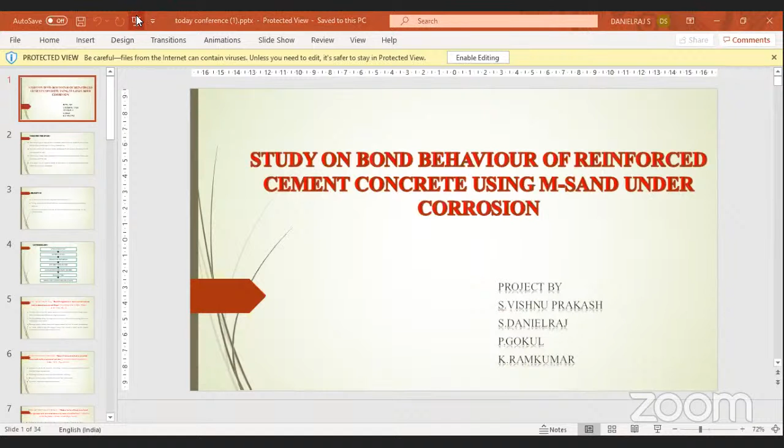Sir, shall we start? You can start, sir. Please start the presentation. Okay, sir. Thank you, sir.

Good afternoon to one and all present here. Our project topic is about a study on bond behavior of reinforced cement concrete using M sand under corrosion. Our project is by me, Vishnu Prakash, Mr. S. Daniel Raj, Mr. P. Gokul, and Mr. K. Ramkumar.

Need for the study: since nowadays corrosion plays a major role in our society in reinforced concrete, it affects the bond between the steel and concrete depending upon the intensity of the corrosion rate. Nowadays river sand availability is less, so in this project we used M sand by replacing river sand. A lot of research studies have already been done to identify the bond behavior of reinforced concrete under corrosion using river sand.

Now we used M sand. Next, the objective of the project: to determine the corrosion level using the accelerated corrosion method, to study the bond behavior of reinforced cement concrete using M sand under corrosion by using the pull-out test, and to undergo a comparative study on the bond behavior of uncorroded specimens with the corroded specimens.

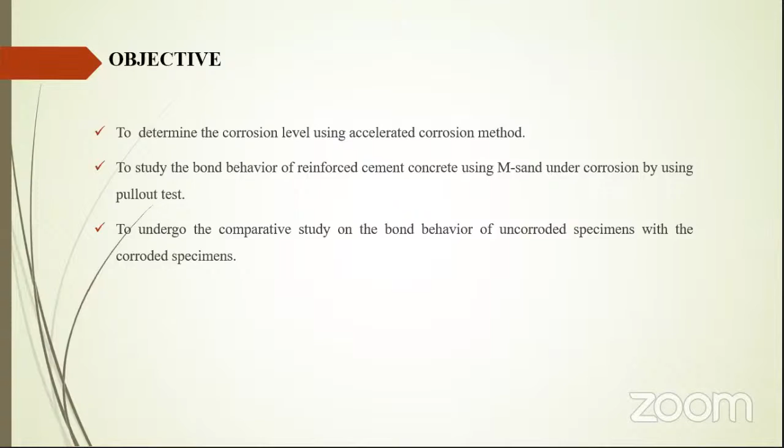Next, our methodology from start: literature study, material study, collecting materials, specimen preparation, then accelerated corrosion method, pull-out test, and next result discussion and conclusion.

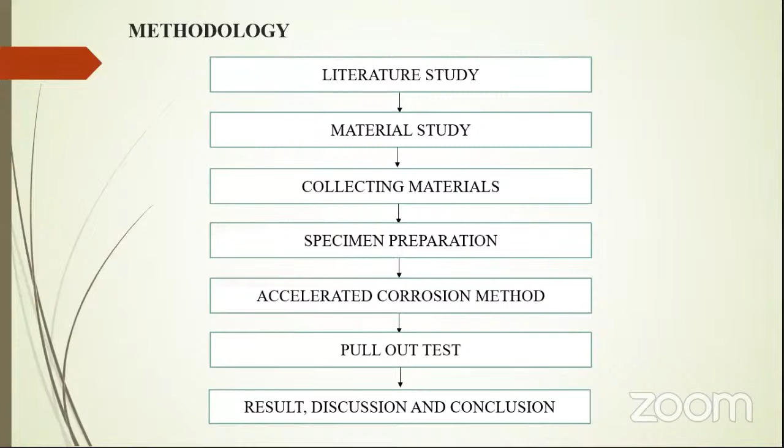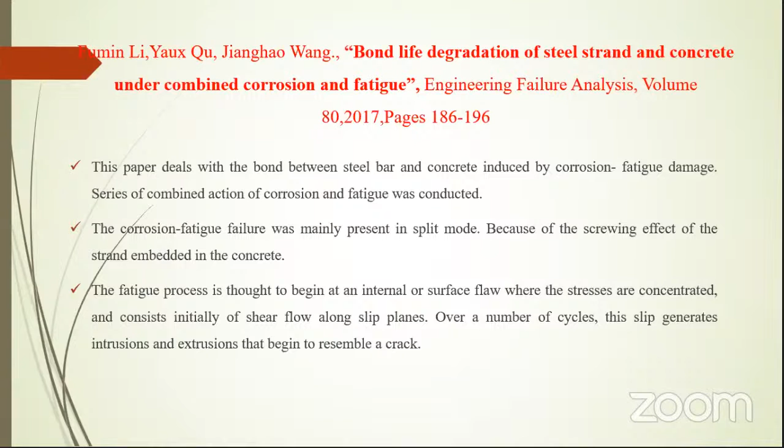Our first literature is about bond life degradation of steel strand and concrete under combined corrosion and fatigue. This paper deals with the bond between steel bar and concrete induced by corrosion fatigue damage. A series of combined actions of corrosion and fatigue was conducted. The corrosion fatigue failure was mainly present in split mode because of the screwing effect of the strand embedded in the concrete. The fatigue process is thought to begin at an internal or surface flaw where stresses are concentrated, and consists initially of shear flow along slip planes. Over a number of cycles, this slip generates intrusion and extrusion that begin to resemble a crack.

The next literature is about the study of the loss of bond in reinforced concrete specimens with accelerated corrosion by means of push-out tests. This paper deals with the following point: the maximum shear stress in the test is not affected by corrosion depth for the given corrosion levels.

The residual stress of specimens with a small corrosion depth was greater than that of non-corroded specimens due to increase of surface roughness. Besides, crack widening was greater for specimens with higher corrosion level, which may explain why the residual stress of those specimens was small.

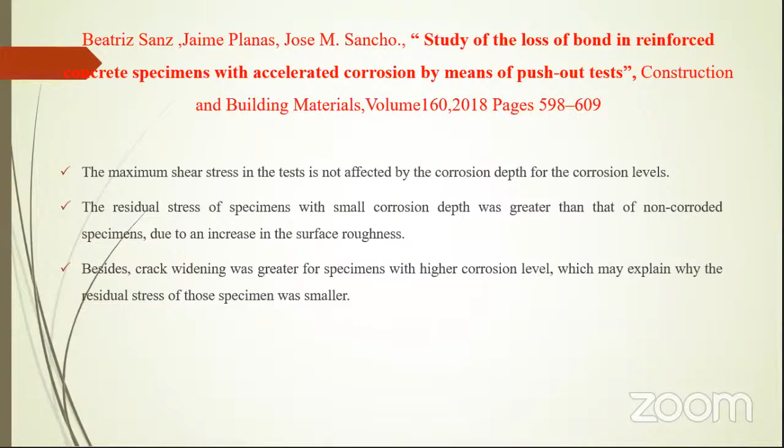The next literature is about bond strength evaluation of corroded steel bars via the surface crack induced by reinforcement corrosion. The corrosion of steel bars in reinforced concrete structures induces concrete cover cracking and leads to reduction in the steel-concrete bond strength. It is further revealed that the bond strength decreases exponentially with the surface crack width. After concrete cover cracking, there is a strong correlation between the surface crack width and the corrosion level. When the crack width becomes relatively large, further increase of corrosion penetration has less influence on crack width.

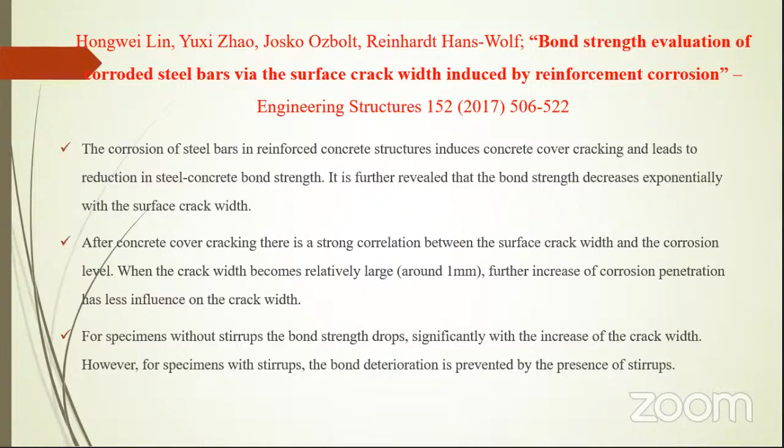For specimens without stirrups, the bond strength drops significantly with the increase of crack width. However, for specimens with stirrups, the bond deterioration is prevented by the presence of stirrups.

The next literature study is about bond behavior with reinforcement corrosion. This paper says that an increase of bond efficiency of up to 2% corrosion was registered in the absence of confinement exerted by stirrups. However, a sudden reduction was observed when higher levels of corrosion were reached, and then only limited residual bond strength was evidenced for increasing levels of corrosion. The confined specimen showed an initial increase in bond efficiency from 0% to 2% level of corrosion, whereas substantial uniformity of bond strength level was maintained for higher levels.

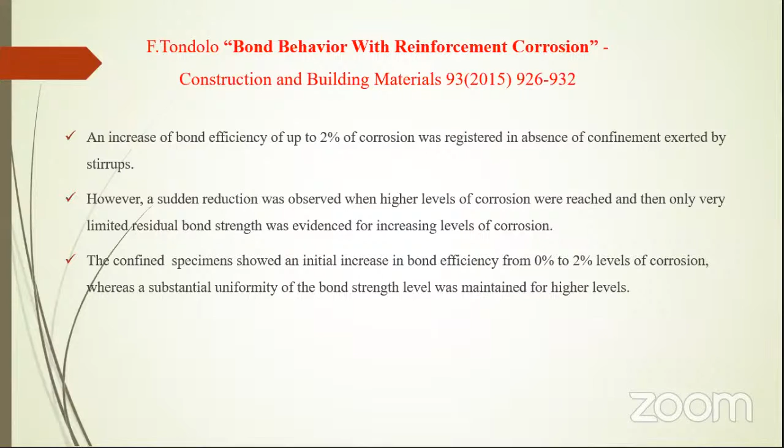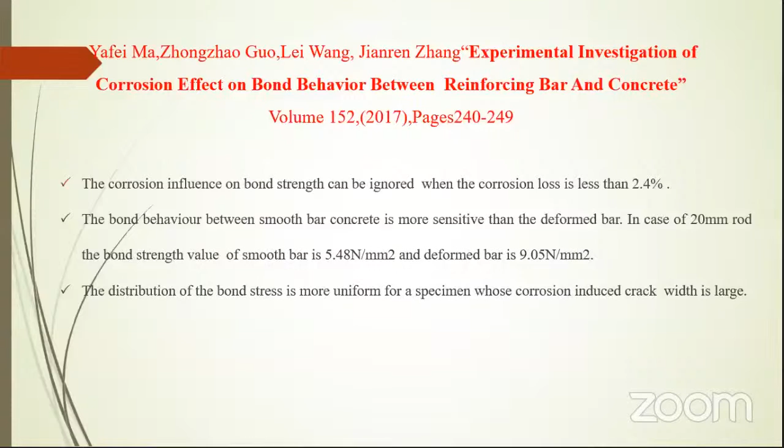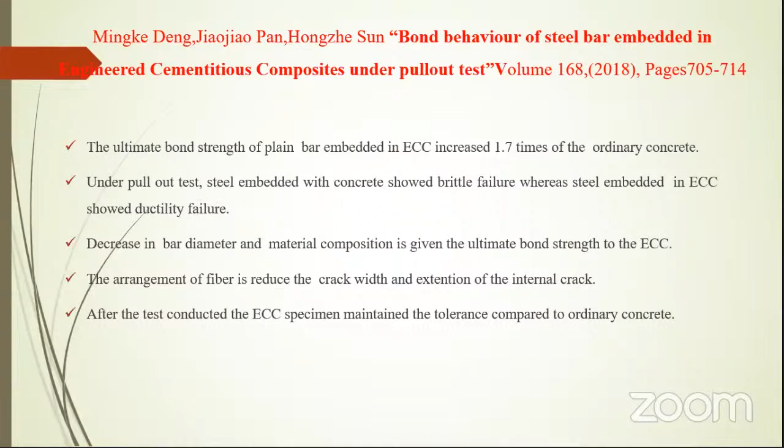Decrease in bar diameter and material composition give the ultimate bond strength to the ECC. The arrangement of fiber reduces the crack width and the extension of the internal crack. After the test conducted, the ECC specimen maintained the tolerance compared to ordinary concrete.

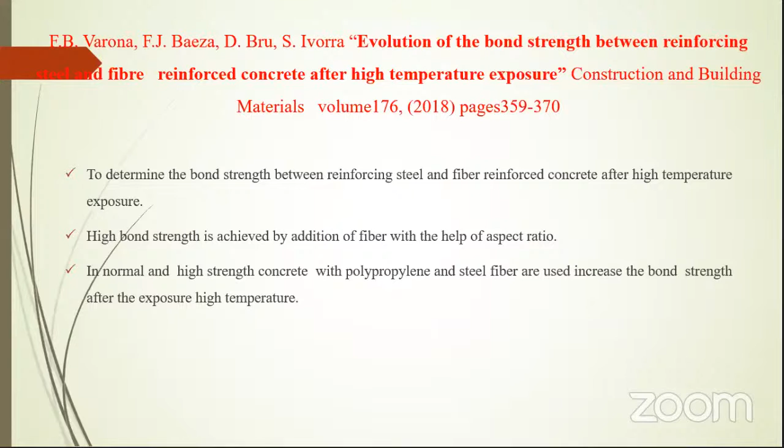The next paper is about evolution of the bond strength between reinforcing steel and fiber reinforced concrete after high temperature exposure, to determine the bond strength between reinforcing steel and fiber reinforced concrete after high temperature exposure. High bond strength is achieved by addition of fiber with the help of aspect ratio. In normal and high strength concrete, polypropylene and steel fiber are used to increase the bond strength after high temperature.

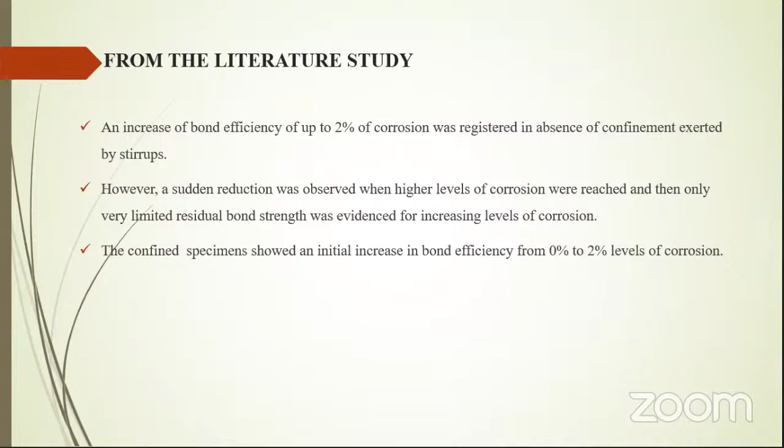From the above literature study, we can take some points: an increase of bond efficiency of up to 2% corrosion was registered in absence of confinement exerted by stirrups. However, a sudden reduction was observed when higher levels of corrosion were reached, and then only very limited residual bond strength was evidenced for increasing levels of corrosion. The confined specimen showed an initial increase in bond efficiency from 0% to 2% levels of corrosion.

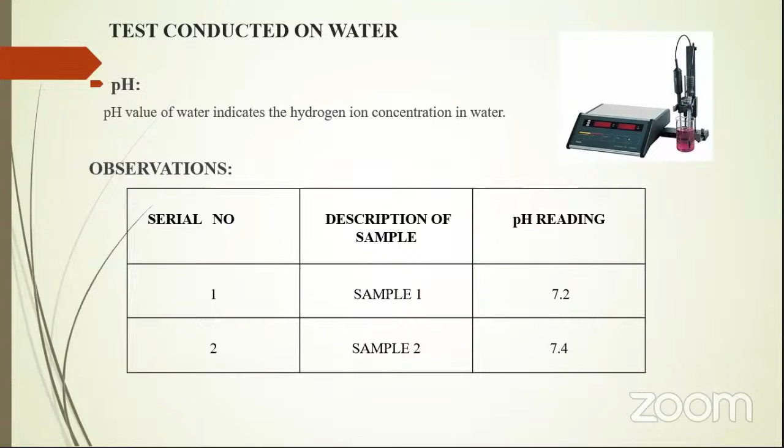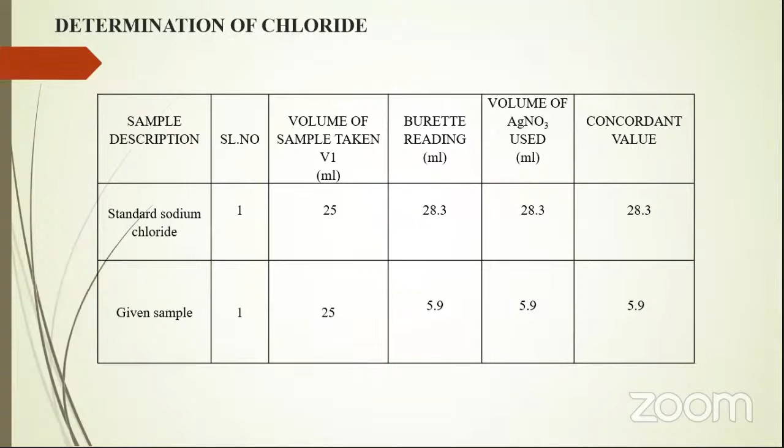In water, the pH value indicates hydrogen ion concentration in water. For our water testing, the pH reading is about 7.2 to 7.4. In determination of chloride, for a standard sodium chloride, the value we get is about 28.3, and the sample is about 5.9. For sulfate,

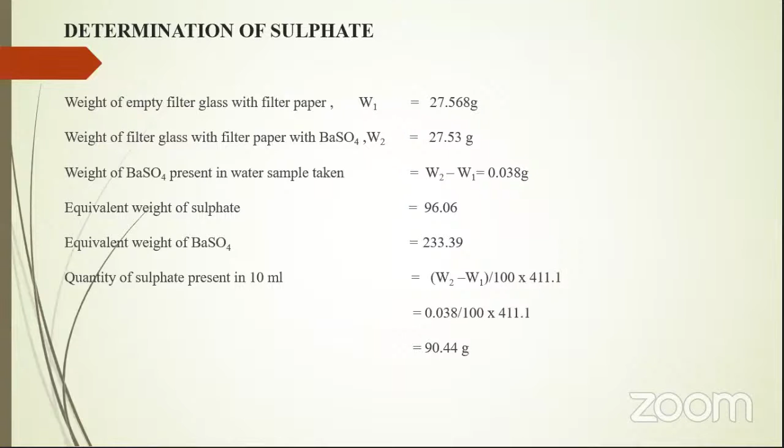In the cement, we use the sulfate present in 10 ml, which is about 90.44 gram.

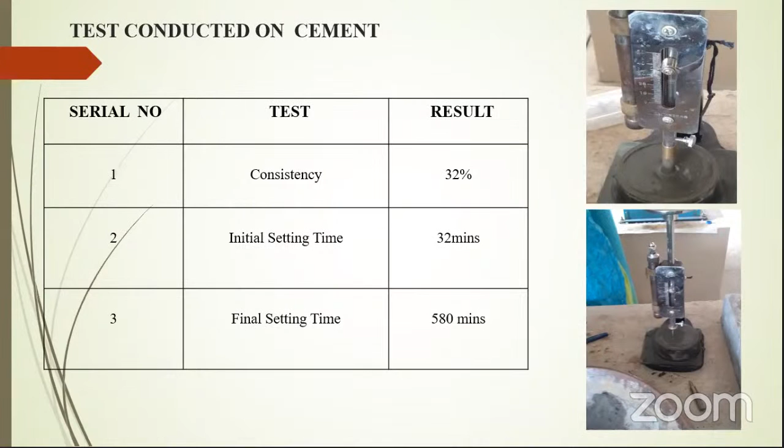Test conducted on water: the permissible limit for the chloride test is about 250 milligram per liter, and for sulfate test we get about 90.44 milligram per liter, for which the permissible limit is 200 milligram per liter. For consistency, the result is about 32%, and initial setting time is 32 minutes. Final setting time is about 580 minutes. For coarse aggregate and fine aggregate, we found the specific gravity for fine aggregate is about 2.7, which is within the permissible limit.

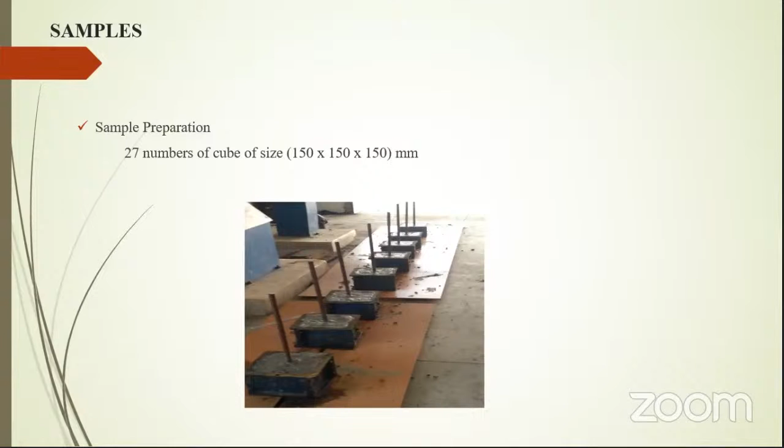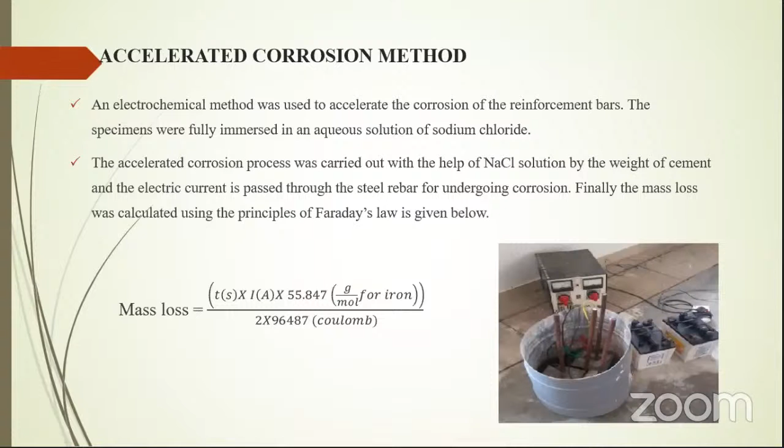Accelerated corrosion method: an electrochemical method was used to accelerate the corrosion of the reinforcement bars. The specimens were fully immersed in an aqueous solution of sodium chloride. The accelerated corrosion process was carried out with the help of NaCl solution by the weight of cement, and electric current is passed through the steel rebar for undergoing corrosion. Finally, the mass loss was calculated using Faraday's law. The mass loss formula is about this.

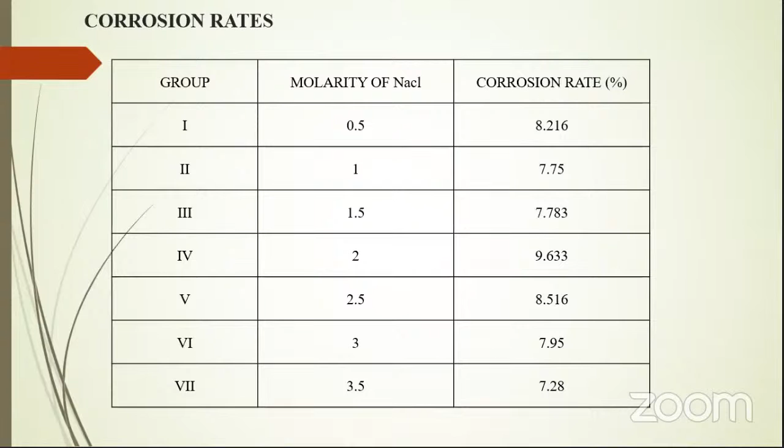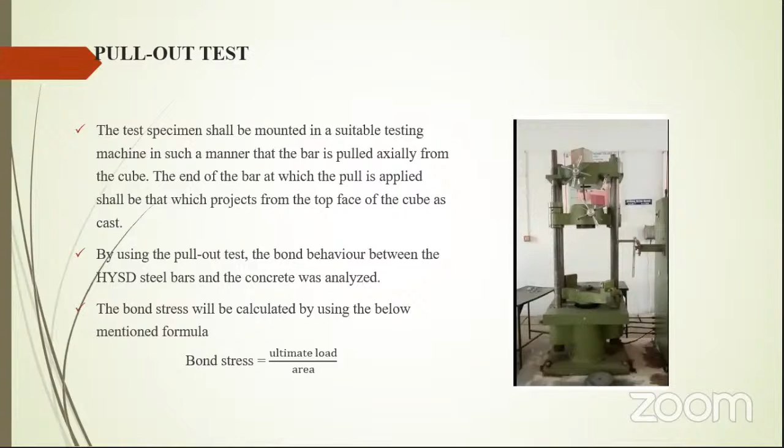Pull-out test: the test specimen shall be mounted in a suitable testing machine in such a manner that the bar is pulled axially from the cube. The end of the bar at which the pull is applied shall be that which projects from the top face of the cube as cast. By using the pull-out test, the bond behavior between HYSD steel bars and concrete was analyzed. The bond stress will be calculated using the formula: bond stress equals ultimate load divided by area. The average bond stress of the corroded specimens for group 1 reached about 8.216, and for group 2, 7.7 megapascals.

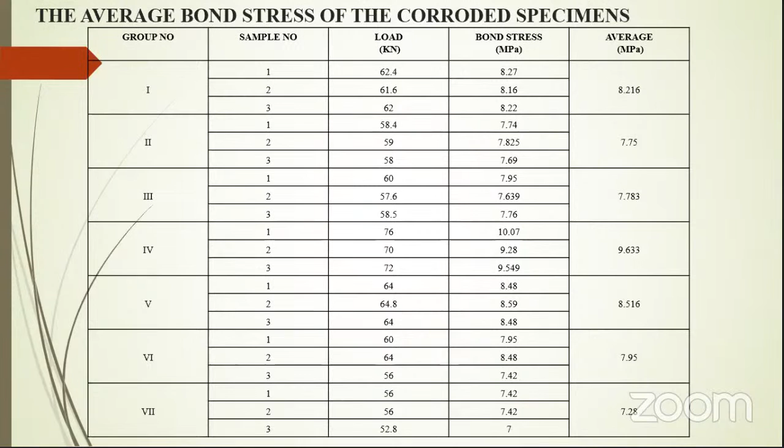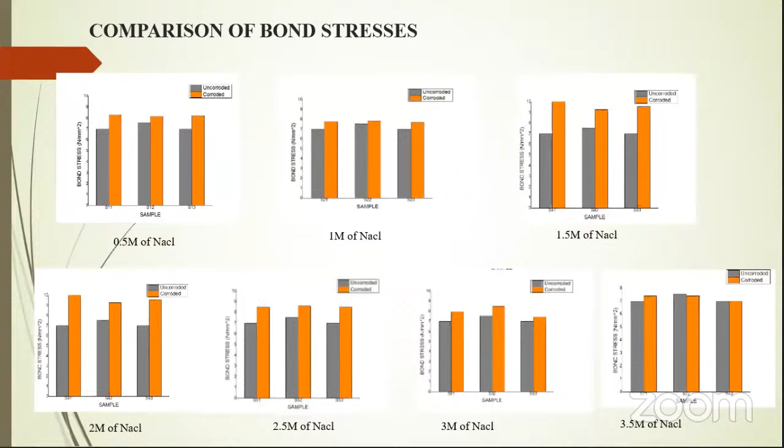Conclusion: the behavior of concrete made up of 100% M sand embedded with high yield strength deformed steel rods was calculated experimentally. With the help of the pull-out test, the variation of bond strength is calculated. The bond behavior of specimens using M sand with corrosion for different corrosion rates was performed. These results are compared with specimens without corrosion to identify the bond behavior between steel bar and concrete. From this comparative study, the average bond strength value increases for initial corrosion rates, followed by a decrease for higher corrosion rates. This initial increase in bond strength is due to the formation of a corrosion layer between the steel and the concrete.

The bond strength values for 0.5 molar NaCl, when compared with uncorroded specimens, increases by 8%; for 1 molar NaCl increases by 8.5%; for 1.5 molar NaCl increases by 34%; for 2 molar NaCl increases by 18.7%; for 2.5 molar NaCl increases by 10.8%; and for 3 molar NaCl increases by 1.5%.

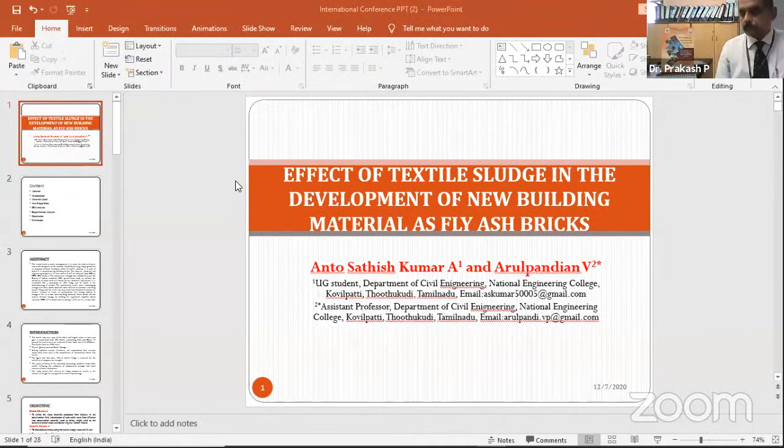Sir, shall I start? Please go ahead, start. Is it Anto Sathish presenting or Arulpandian presenting? Sir, Anto Sathish Kumar, sir. Okay, please start your presentation, sir. Oh okay sir, thanks. Good afternoon, one and all present here.

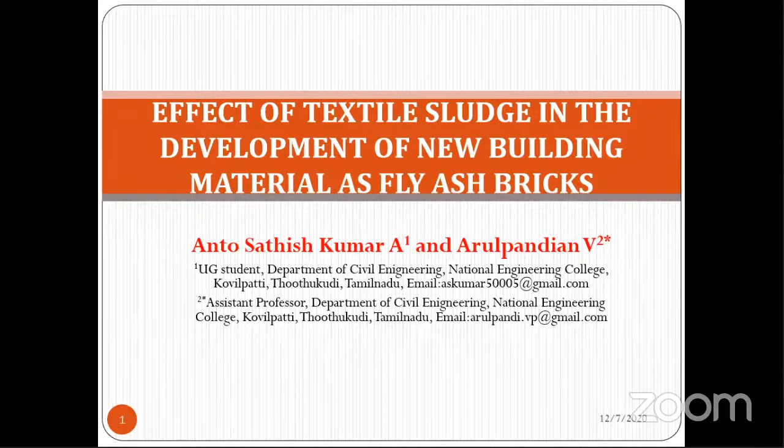Our topic is Effect of Textile Sludge in the Development of New Building Material as Fly Ash Bricks. Myself, Anto Sathish Kumar, along with Arulpandian, we are from the Civil Engineering Department, National Engineering College, Kovilpatti, Tamil Nadu. These are the contents I'll cover in the following slides.

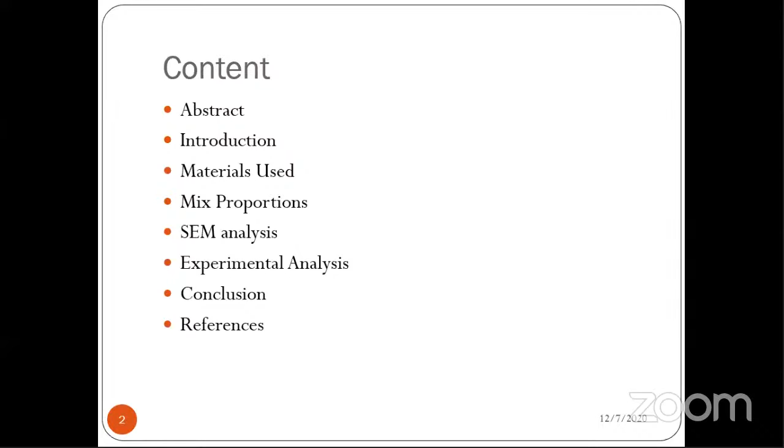Let's see one by one, starting with the abstract. The current trend in waste management is to reuse industrial waste into usable products. Sludge is generated in the common effluent treatment plant of the textile industry. The physical, chemical, and engineering properties of this material will be analyzed using EDS or EDX and other analyses. Compressive strength testing was conducted as per Bureau of Indian Standards to evaluate the suitability of this material in structural applications. It is concluded that a maximum of 12% of sludge can be added in the bricks. The preliminary results were encouraging enough. Along with these results, further research in terms of leachability testing is being conducted to recognize this as a non-toxic building material. This material does not require thermal energy for binding, which consumes about 7,000 tons of firewood, and air curing is sufficient for just 14 days.

Introduction: The textile industry is one of the oldest and largest sectors in India, with historical association to the Silk Route connecting India and China. At present, textile units are scattered all over India. Out of 21,076 units, Tamil Nadu alone has 5,285 units.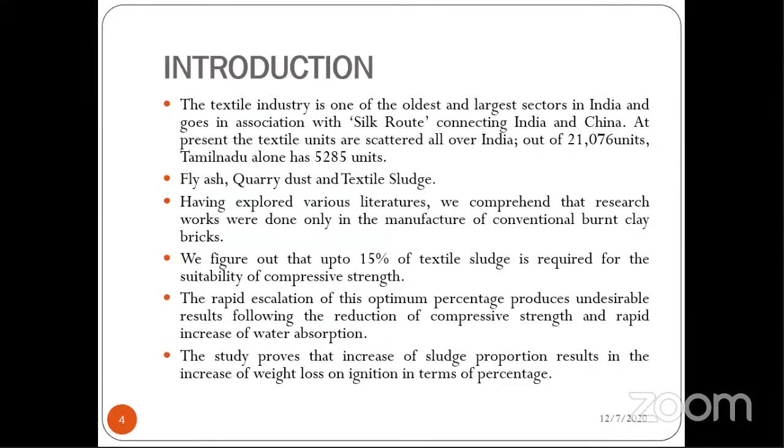Let's come to the objective. Our objective is to utilize waste material produced from industry in the construction field. Transmission of such solid waste from effluent into construction material might yield a culture of preservation and conserving mother nature. Our specific objective is to manufacture brick using textile sludge waste and fly ash.

We aim to study the effect of sludge on the plasticity index of the brick, to carry out experimental investigation on the brick to test its compression, water absorption and permeability, and to save thermal energy, which amounts to 70 tons of firewood for firing 1 lakh bricks. The new process does not require firing.

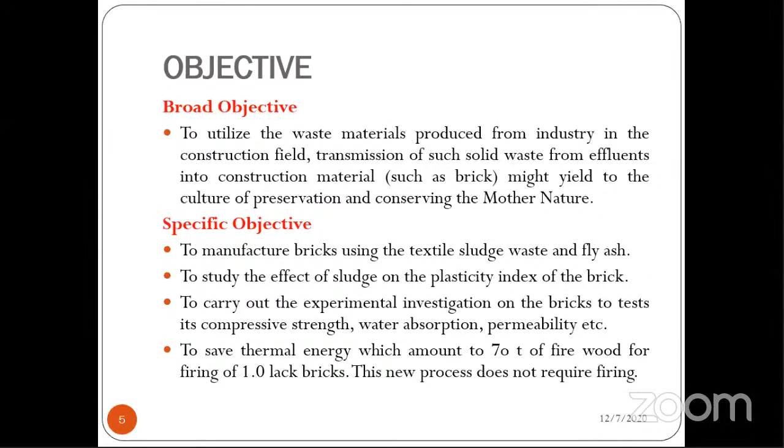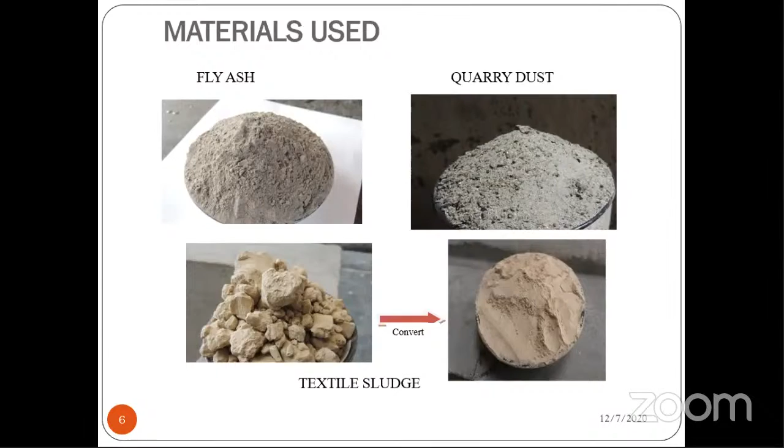These are the materials we use: fly ash, quarry dust, and textile sludge. We converted the textile sludge into powder form. Let's look at the first one, fly ash. Fly ash is a highly dispersive powder.

These byproducts are dumped in large scale at every thermal power station. For the current research work, fly ash from thermal power stations is obtained and will be utilized in the manufacture of bricks. Fly ash particles, which are generally spherical, these small glass spheres improve the fluidity and workability.

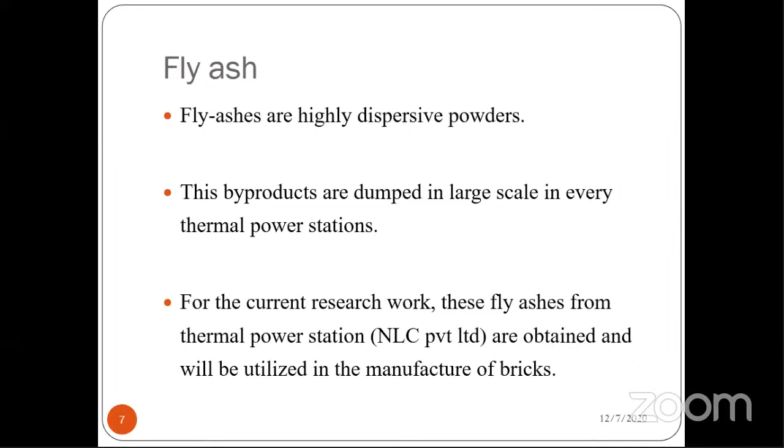Next, quarry dust. In stone crusher quarries, a considerable amount of quarry dust is produced as a byproduct. Currently, most quarry dust is disposed of in sanitary landfills or open dumped in uncontrolled waste pits and open areas. Substantial amounts of this powder have accumulated, and its utilization poses an important problem. Hence, such powder emission produces air pollution at the quarry.

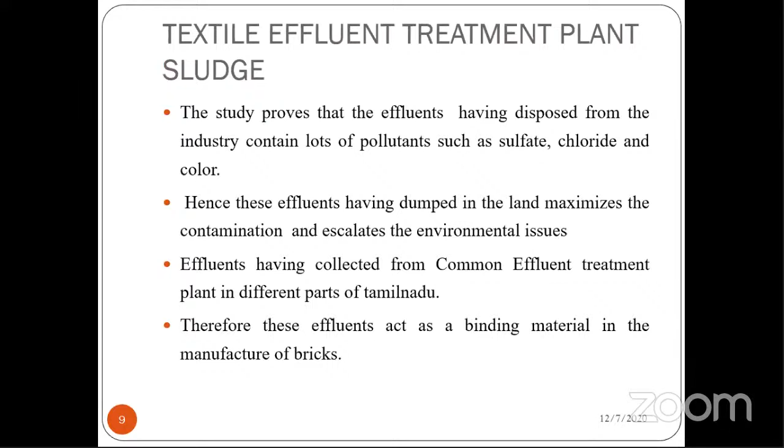It does not combust as well as other materials, and sludge. The study proves that the effluent disposed from industry contains lots of pollutants such as sulfate, chloride, and color. Hence, this effluent dumped into the land maximizes contamination and escalates environmental issues. Effluents were collected from common effluent treatment plants in different parts of Tamil Nadu. Therefore, this effluent acts as a binding material in the manufacture of bricks.

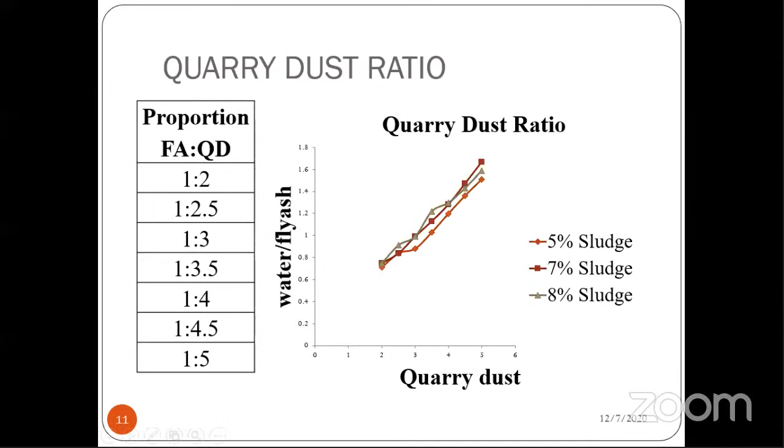Let's come to the mixed proportion for fly ash and quarry dust ratio. This is the graph plotted between water, fly ash, and quarry dust. Here we used 3 different percentages of sludge: 5, 7 and 8. Finally, we took 3 as the optimum one. Here we see that before and after 3, the results vary.

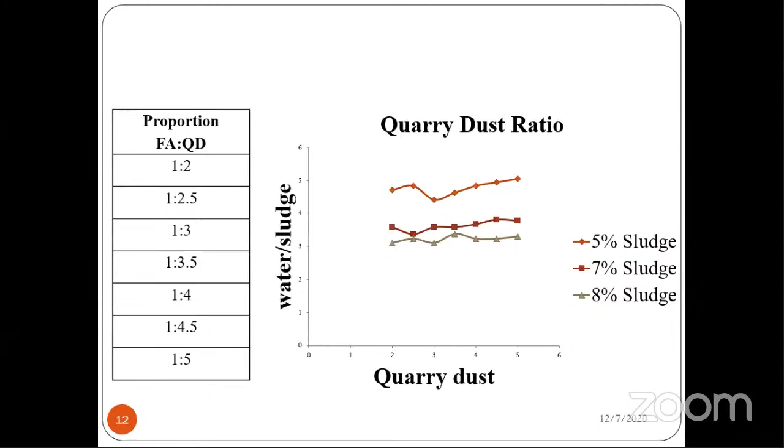Next, here the plot is drawn between water, sludge, and quarry dust. Here also we use the same percentages, and here also we get the same 3 as optimum. We finalize 3 as the optimum, and we go with 3 ratios: 1:3, 1:2.5, and 1:2.

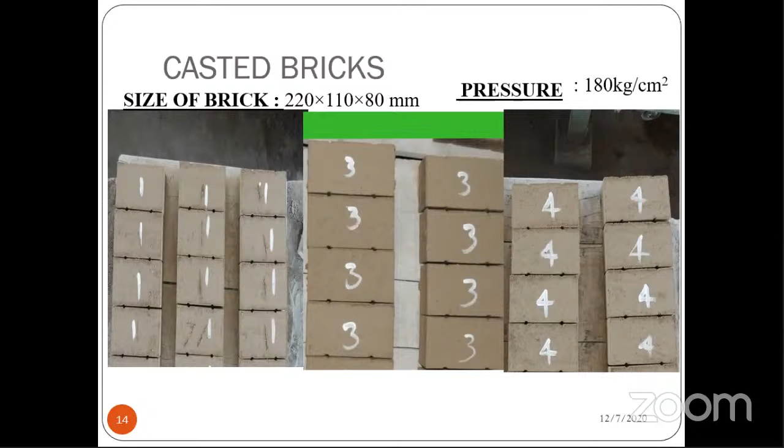And we cast bricks. The size of the bricks is 220 cross 110 into 80 mm. The hydrostatic pressure applied to make the brick was 180 kilogram per centimeter square. And now the results.

Having analyzed the strength of the brick, we discovered that the brick remained inadequate to achieve the required strength as per IS norms. So we planned to add 2 additional materials, lime and gypsum, in addition to the existing raw material. We eventually obtained the desirable result with the further addition of lime and gypsum, intended to enhance the required strength of the fly ash bricks.

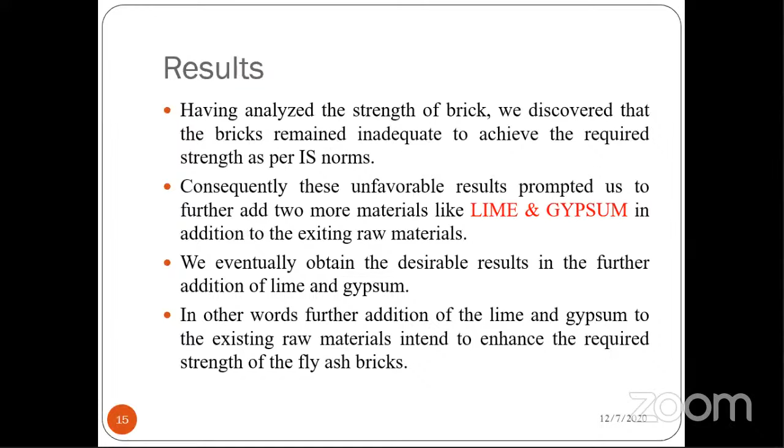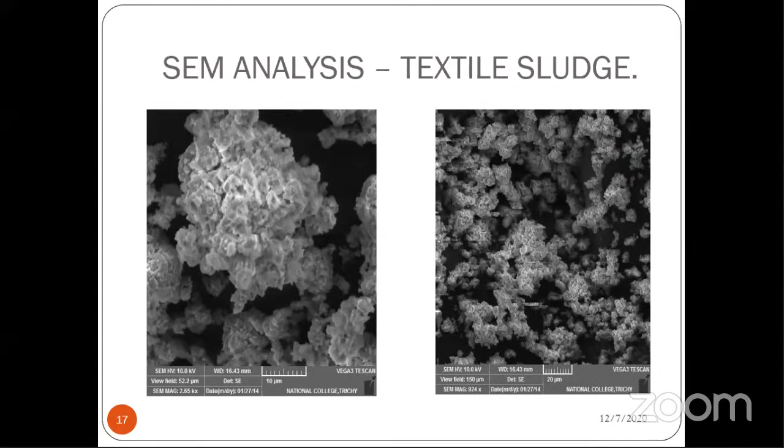And these are the images. We did some analysis to find the particle separation. It shows particle size inside the structure. The first image is at 10 micron distance, and others are at 20, 5, and 2 microns.

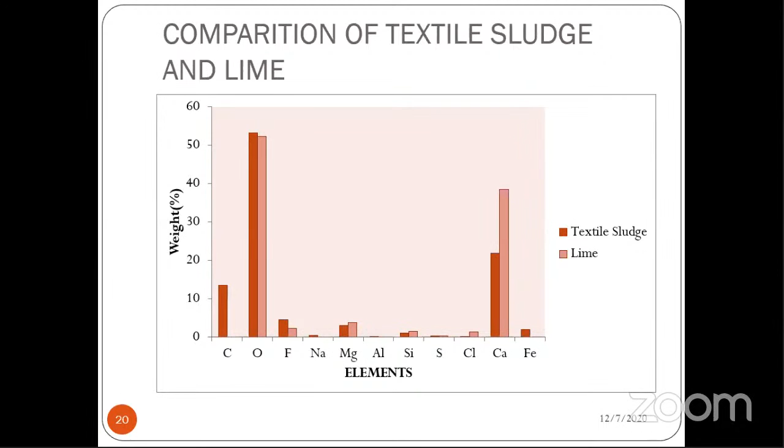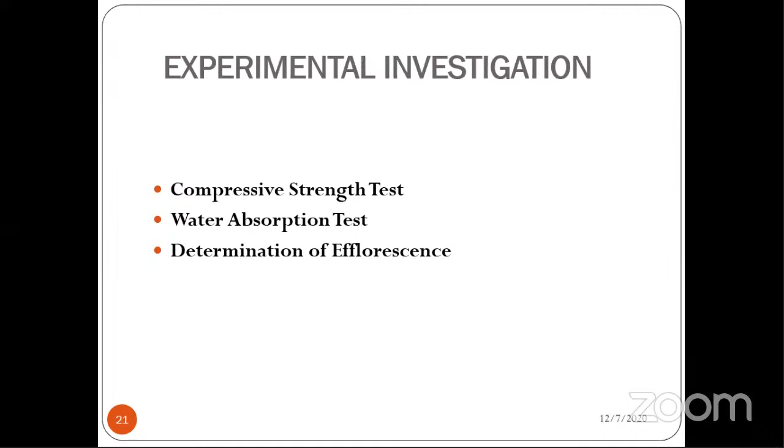Experimental investigation included compressive strength test, water absorption test, and determination of efflorescence. For compressive strength, the y-axis shows compressive strength and the x-axis shows mix combination. Here we used 6 different combinations and found the 7th day and 14th day compressive strength.

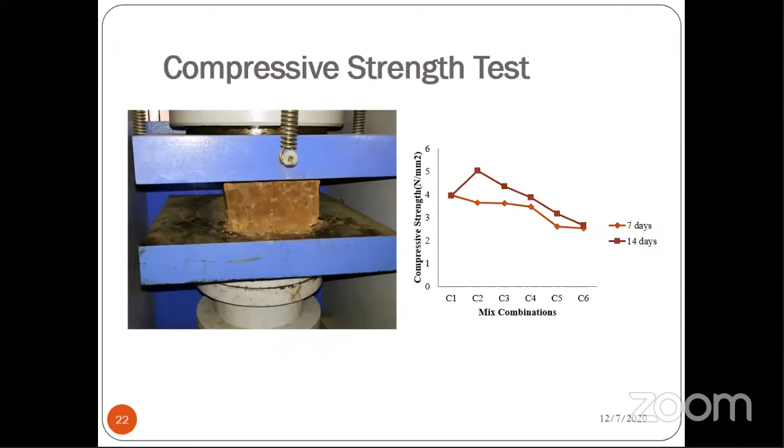And water absorption test and efflorescence. The soluble salts being present in bricks will cause efflorescence on the surface of bricks. For finding out the presence of soluble salts in bricks, these tests were carried out.

The bricks are immersed in water for 24 hours. Then the bricks were taken out and allowed to dry in shade as per IS norms. As per IS norm, the liability to efflorescence shall be reported as nil, slight, moderate, heavy, or serious. Here we get the result as nil.

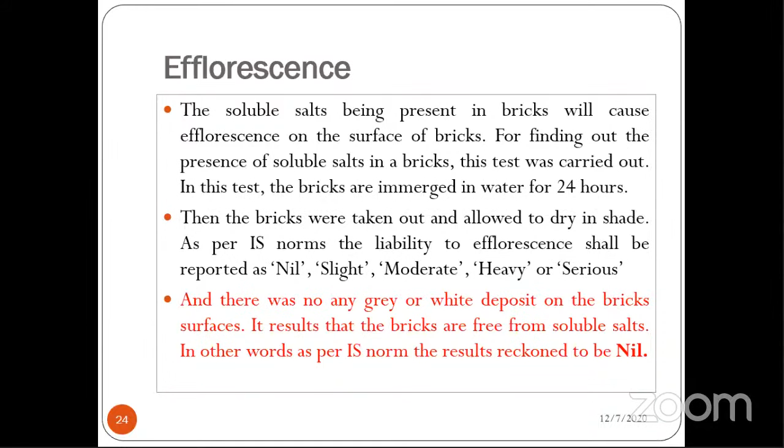And finally come to the conclusion. The result of the brick 1:2, 1:2.5, and 1:3, with one part being fly ash and the other as quarry dust. In addition, textile sludge was added in the ratio of 7%, 10%, and 15%. The shape of the brick was well obtained, but does not attain the minimum strength of 3.5 Newton per mm square as per IS.

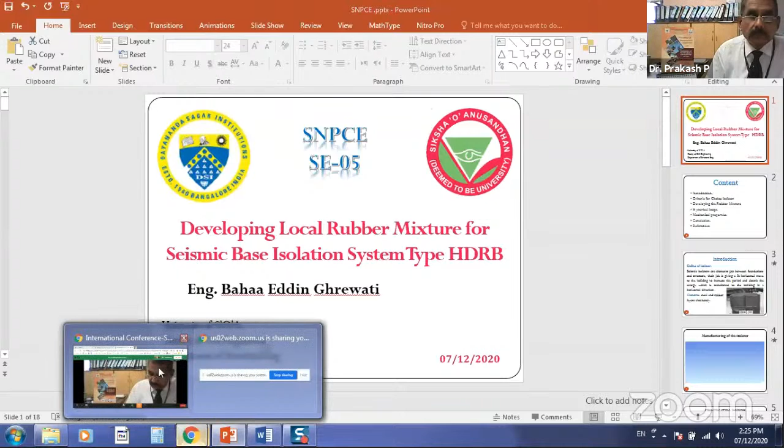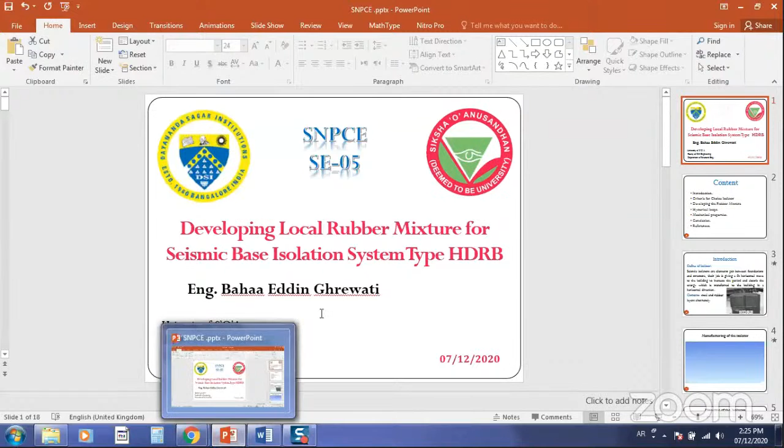Thank you, sir. Good afternoon, all. I would like to thank you for giving me a chance to present my article, which joins mechanical and civil engineering together, entitled Developing Local Rubber Mixture for Seismic Base Isolation System Type HDRB. It contains introduction, criteria of choosing the isolator, developing the rubber mixture, technical and mechanical properties, and finally conclusion.

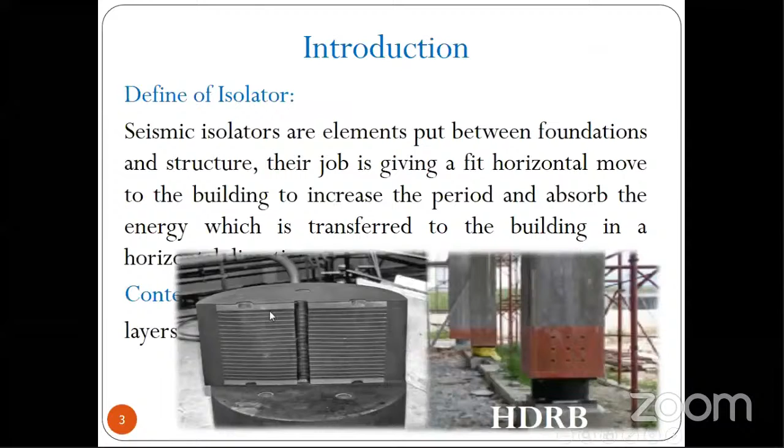Seismic isolators are elements put between foundations and structure. Their job is giving a fit horizontal move to the building to increase the period and absorb the energy which is transferred to the building in horizontal direction. The isolator consists of steel and rubber layers alternately, as shown in this figure.

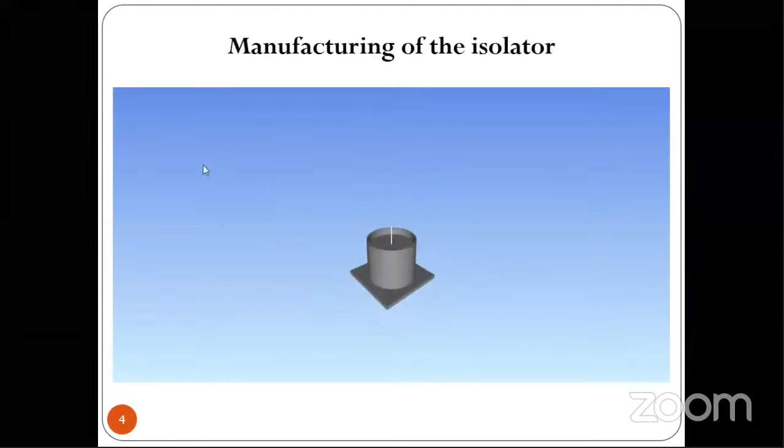This video shows the manufacturing process of the isolator, where we put the steel and rubber layers alternately. This video also shows the difference between an isolated and non-isolated building, where the objectives of isolators are avoiding human usage interruption and decreasing building failure.

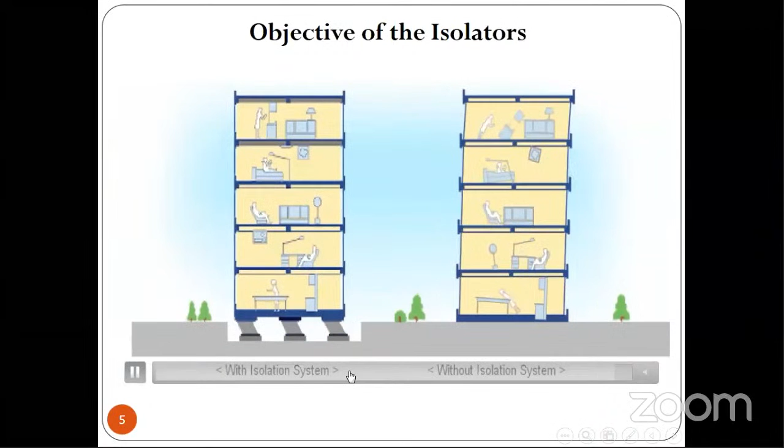The isolators increase the building period that leads to decrease the acceleration and the horizontal load as well. And the damping ratio for isolators is between 5 to 30%.

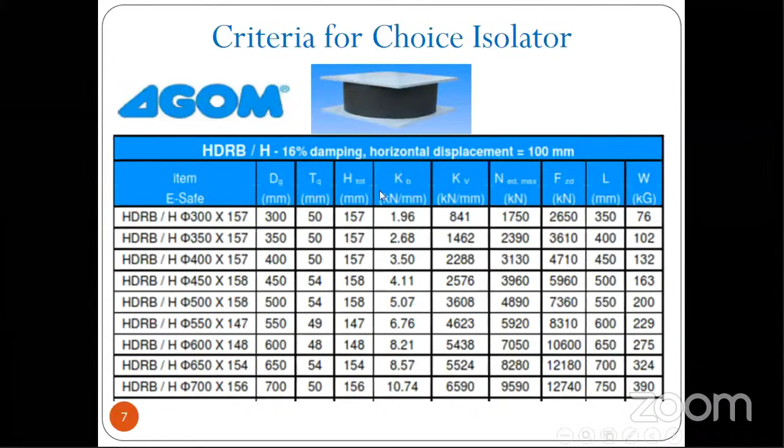This is a table from a company which produces several kinds of isolators. The table has many important details like damping ratio, the displacement, also this is the critical displacement, dimensions of the isolator, diameter and height, also vertical and horizontal rigidity.

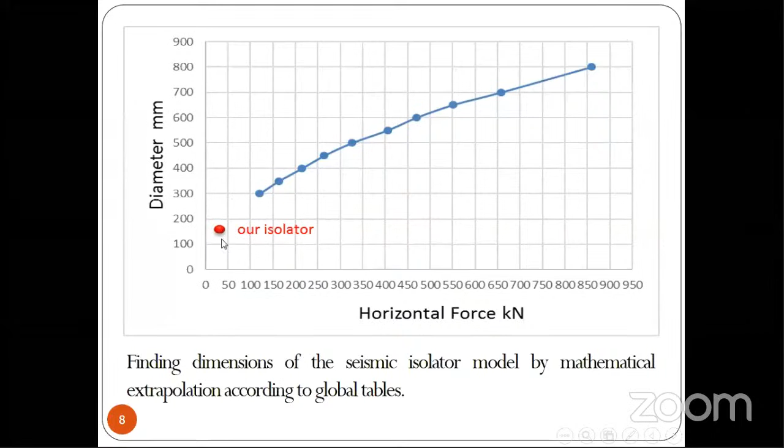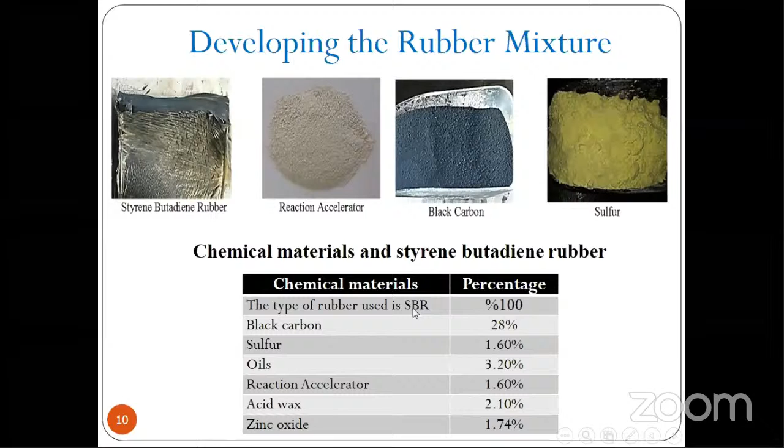The rubber mixture contains several materials with specific amounts like rubber, carbon, sulfur, oil, with specific percentage depending on the rubber amount.

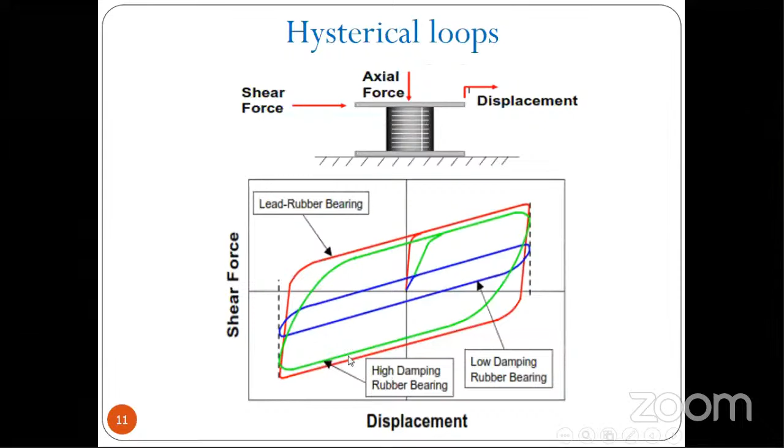The relationship between horizontal load and displacement is known by hysteresis loops, and we can see the most bending kind of isolators is lead rubber bearing. Then we can see HDRB, which is high damping rubber bearing, which is our isolator. Then the low damping one.

The hysteresis loop is created by cyclic load: the system is loaded here, then we unload, and finally we reload again. This green area expresses the amount of energy dissipated.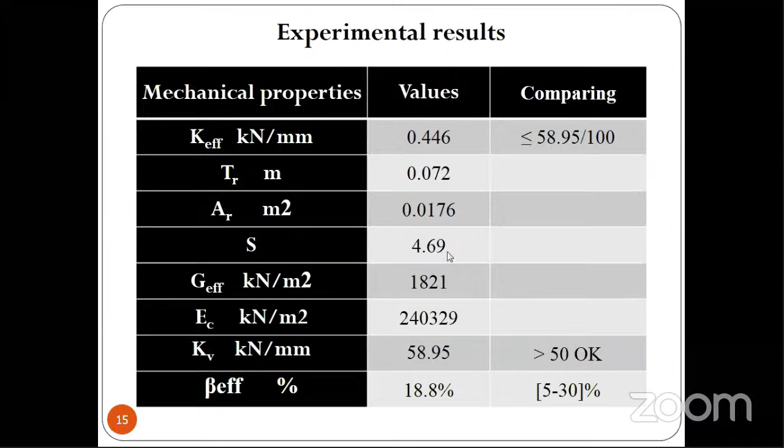After finding the experimental results, we compared it, and it was logical. This video shows the experiment of the isolator.

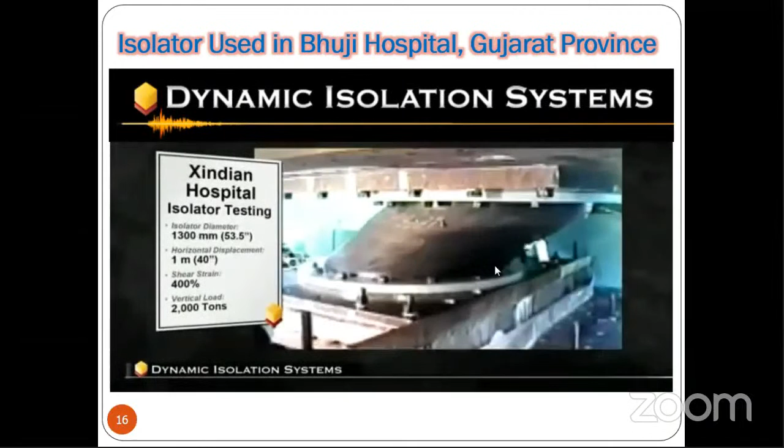This isolator is used in Bhuji Hospital. Experiment 1, you can see here the isolator diameter is 1 meter and 30 centimeters. And the horizontal displacement, the critical displacement, is 1 meter.

And he can get vertical load which reaches 2,000 tons.

As a conclusion, the difference between two forces in both negative and positive directions of the same load is explained by several causes, such as reading error and pressure measurement. The experimental values of horizontal and vertical rigidity and shear factor of the experimental model are logical and close to global standards. The difference of force values between loads refers to the energy which is absorbed by rubber, which means the breakdown of carbon found in the rubber material.

Thank you. Hello. Any questions, please? Please stop sharing your screen. I have already stopped sharing. I'm not sharing my screen. Sir, we are not able to see. I'm not sharing. Oh, sorry. Is it fine now? No, we are not able to see, sir. You are not sharing the screen, sir. I stopped sharing. It wasn't visible. No, not yet, it's not being shared. When I present, it wasn't sharing. Why did no one tell me? I'm unable to see, you are not sharing the screen. Would you please share the screen of your presentation? Let me check, is it sharing now or not? Yes, sir, is it visible? Now it's visible. Yes, yes, yeah, yes sir, now we can see. I will go first, fast, okay, yeah.

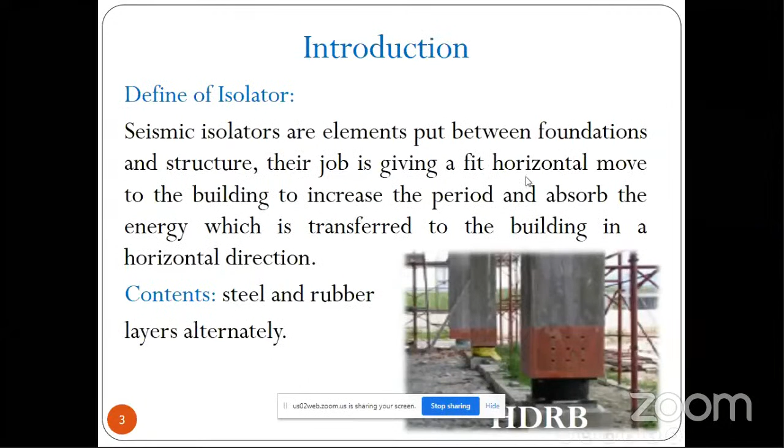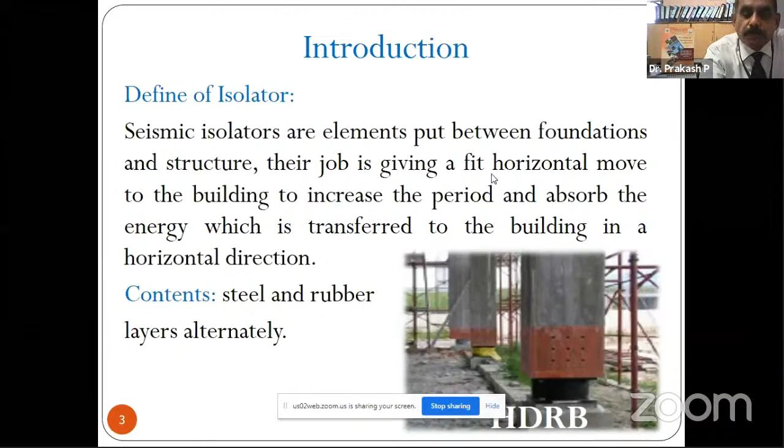Introduction. Seismic isolators are elements put between foundation and structure, their job is giving... This part is over, would you please proceed? Corrosion is also over, would you please proceed? Come to the conclusion, sir. Okay, come to the conclusion. Yes, sir, yeah please go ahead. Sir, could I present fast? It will take 5 minutes only. Please conclude your presentation, please.